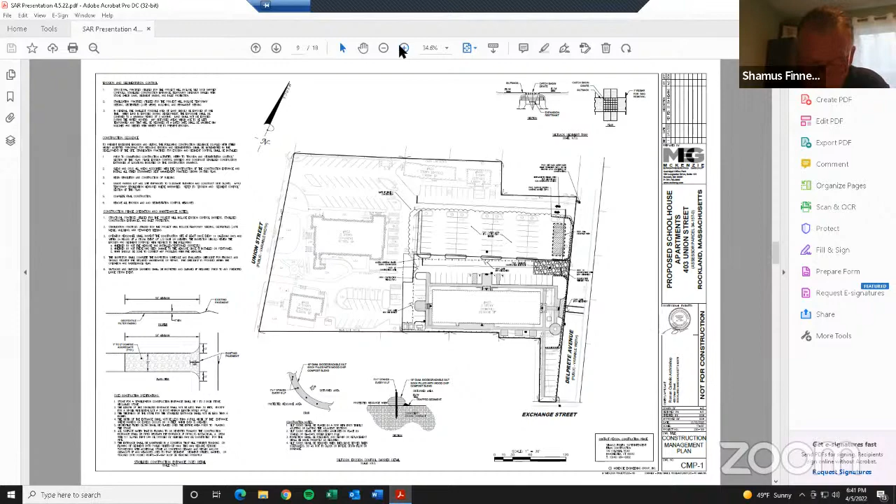Traffic control plans are set to control traffic with construction and neighbors. We'll manage all traffic and coordinate with neighboring properties. For site management, we'll have regular trash and debris removal, with all dumpsters enclosed in the fence, and chutes from the second floor down during demolition.

For noise control, we'll try not to do any noisy work before 8 o'clock in the morning. For rodent control, we'll have an extermination company on site with a whole process set up. Snow removal during construction will be done by laborers on site inside the construction area, and the exterior will be done by a company. Material deliveries will all be coordinated inside the fence, with no deliveries out on the streets.

Erosion control, I already spoke about - we'll have silt socks and everything set up for any runoff. We have a construction staging area, and parking will be right outside the fence for all employees and construction parking, so nobody will be on the street. For construction signage, we'll have all necessary signage around the fences posted with contact people such as myself, so anybody can get a hold of us at any time.

That's basically it.

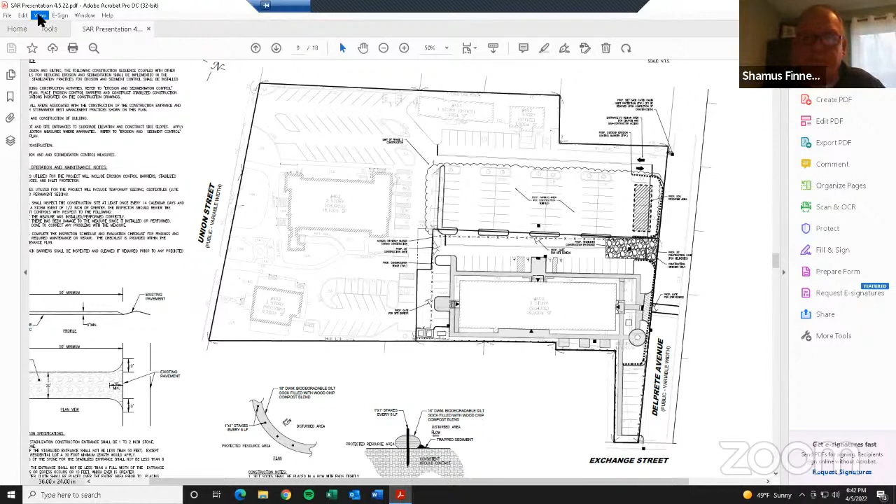Nice, well thought out plan. Can I ask a quick question?

When it comes to material deliveries, big larger truck deliveries - not just everybody's pickup truck - how are you guys going to access the site? Are you coming in through Union Street? Are you coming in through, let's say, Exchange and down Delprete?

That would be going to Shamus, and Shamus is muted. Shamus, Rob, I can handle that question. That's something that Shamus's office would coordinate with the police department for their preferred truck routes into the location.

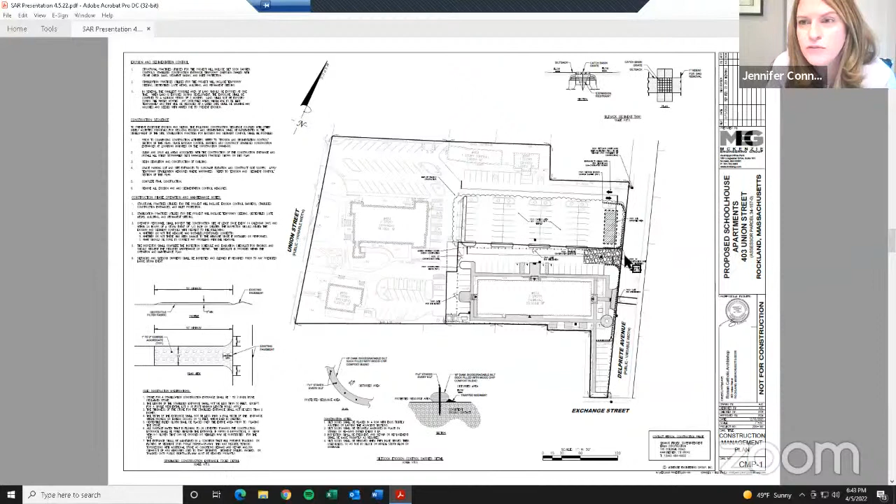Okay, as long as the PD is okay with that, that's a great answer. Very good, thank you. Thank you. All right, so we got that. That was a good addition to the plan set.

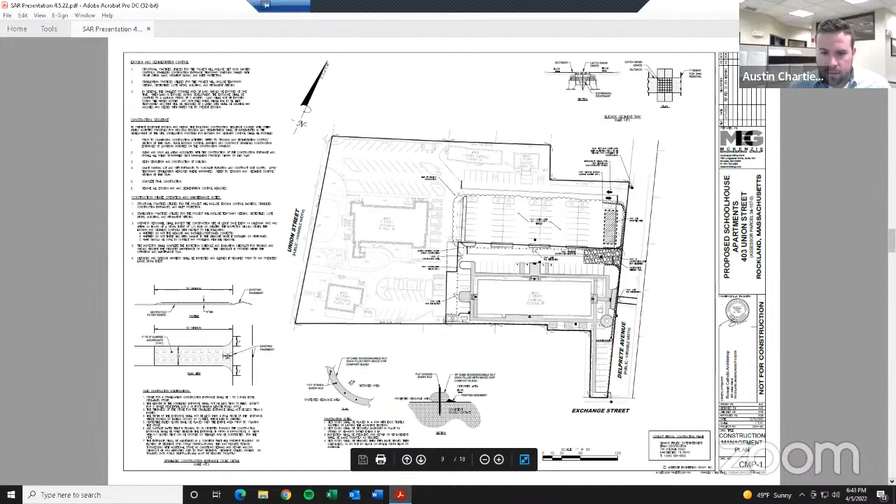Mr. Chartier, where do you want to go from here? I think the next is the landscape revisions. We've basically prepared a full set here. I think Michael might be here from MDLA. Yes, this is Mike Rettenmeyer from MDLA, representing our firm.

Thanks, Austin. Mike, if you want to, please just take us through the plan. Thanks, Rob. So what we have here in our permit set is our planting plan, as well as a lighting and photometrics plan. Up on the screen is our planting plan. You could see around the proposed parking area, we've included street trees and planted islands where possible across from the main entry.

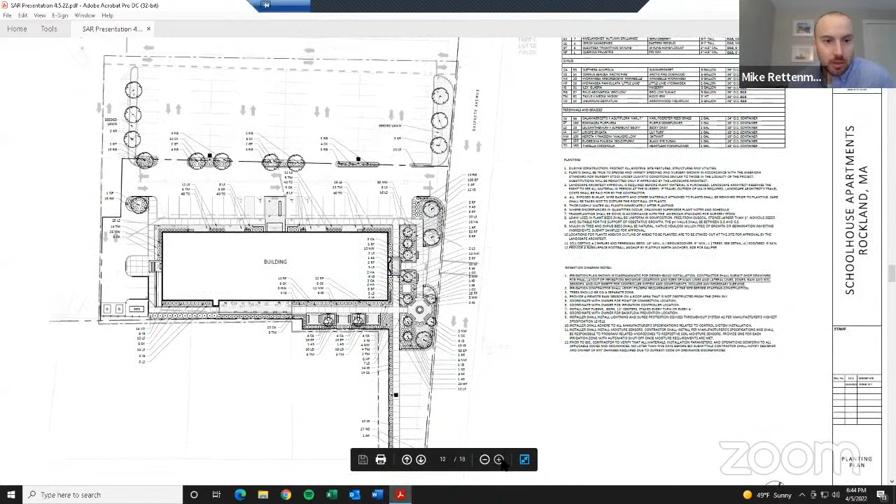Closer to the center of the building at the main entrance, we've provided shrub and perennial massing to create a nice visual entry. There's some seating options for residents as well. Going towards Delprete, which is on the right side of the plan, we've included a linear grouping of shade trees, as well as a mix of pedestrian circulation along the drop-off and some seating opportunities at that entrance.

With this being a residential building, we wanted to provide some different options for gathering outside - you could see the circular area with a water feature, some smaller bench areas just to the left, as well as some raised perennial garden beds. Again, we've planted with shrubs and perennials around the limits, around the fence that goes along that property line as well, adding some nice visual interest to the streetscape along Delprete, as well as within the parking area and the main entry.

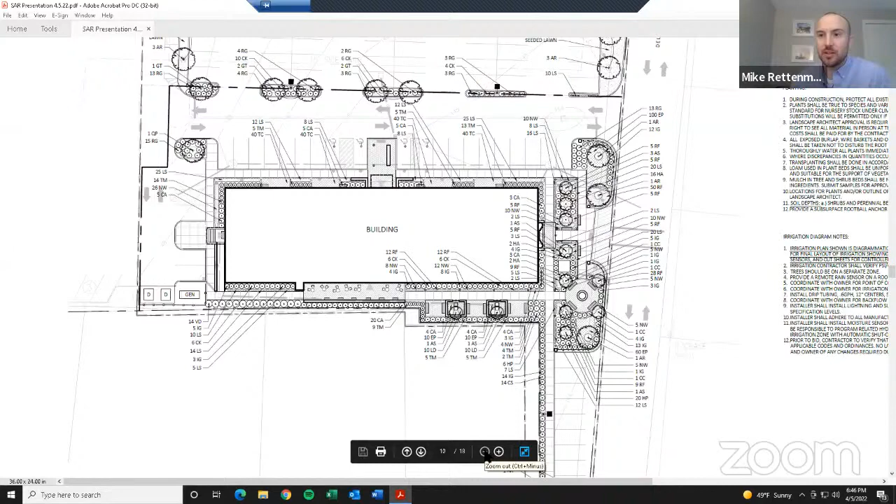But again, this is substantial - this is one of the better landscape plans we've seen presented. Thank you. But the goal is just to create a nice experience for the people that live there, as well as any visitors to the site and the general neighborhood. So there'll be year-round interest between the different perennials, evergreen shrubs, and that type of plant material.

On the next sheet, this is our photometrics plan. All of our fixtures are dark sky compliant. There's fixtures mounted to the building that illuminate the parking spaces directly adjacent to the main entry. We've included two parking lot pole lights in the parking islands directly above. Thank you for running the cursor there.

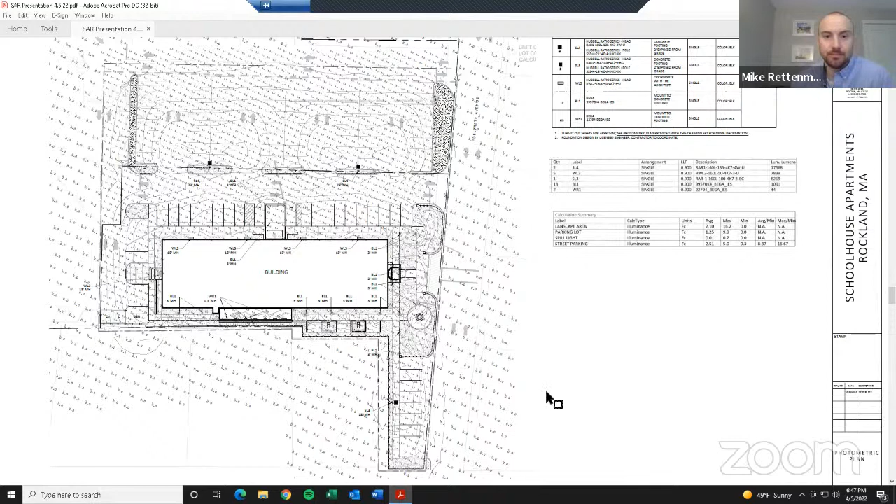Along the pedestrian walkways on the lower side of the page, we've included bollard lighting, and there's a large seat wall in the gathering space towards the center of the building that has bench and low lighting as well, just to safely illuminate any pedestrian walkways. We've minimized any light spill over the property lines with how these lights have been located. On the next sheet are just some cut sheets of those fixtures, I believe.

So you can see the circular light is the bench lighting. We have the bollard light to the right of that, and then the building mounted lighting and the pole lights are all of the same family. So LED lighting, full cutoff, and just simple fixtures to not draw too much attention.

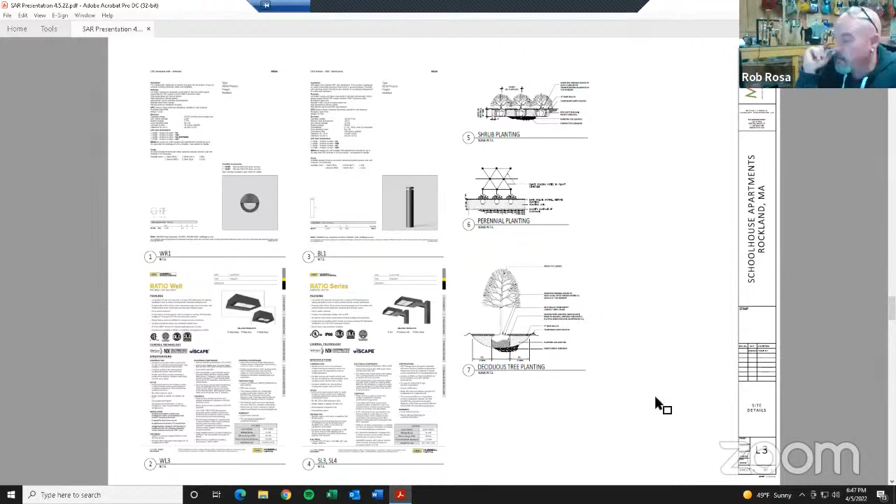Well done. I believe that should be it from the landscape side of things. So thank you. I'd like to get back to Pat Brennan's letter. I was wondering if Austin could give it your general feeling as an engineer, your feeling to that letter?

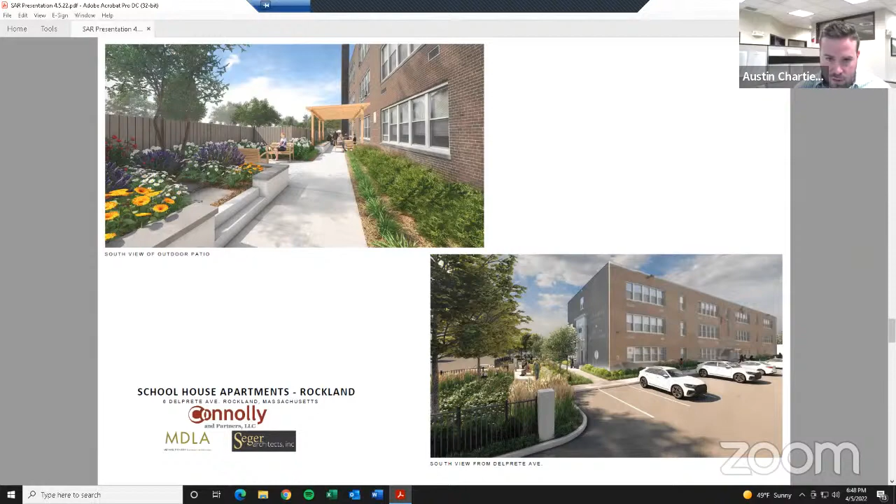Yeah, overall the comments are very minor in nature. The two comments were basically: upgrade existing catch basins that are going to be altered to provide a 4-foot sump, as well as an oil trap or a hood over the outlet, which is pretty common practice in general. So we would definitely be upgrading all the drainage infrastructure that is altered and improved to basically capture anything new on site. Also, because of the proposed change around the building, we're actually decreasing the runoff because we're providing some landscaping features and decreasing the impervious cover around the building. Today the pavement runs right up to it.

So none of the comments would really require much, it would just be addressed in the next submittal moving forward, I suppose. A simple note would suffice.

Right, exactly. I do have one question for you, Mr. Chartier. When it comes to the catch basins that are existing, do you know if they're deep sump or if they're just old school catch basins with nothing?

Yeah, I've been out there and I did inspect some of them. From what I saw, most of them don't have sumps, or not 4-foot sumps. A couple of them do have 2-foot sumps, but they're full of stuff. So obviously, as part of this work, there will be some cleaning of pipes and structures that will take place.

Okay, so anything that's really getting altered on our site is going to be improved to bring in compliant structures. And there will be some altering because the grading is changing off the building. So it'll definitely be an improvement to what's there.

Definitely, definitely. I think you guys knew about it. I'm not sure if the applicant or the team members for the applicant knew about this, but no, we did. We talked about this last time. We were going to have a site meeting. We did put together a site meeting for all that were involved or all that were curious.

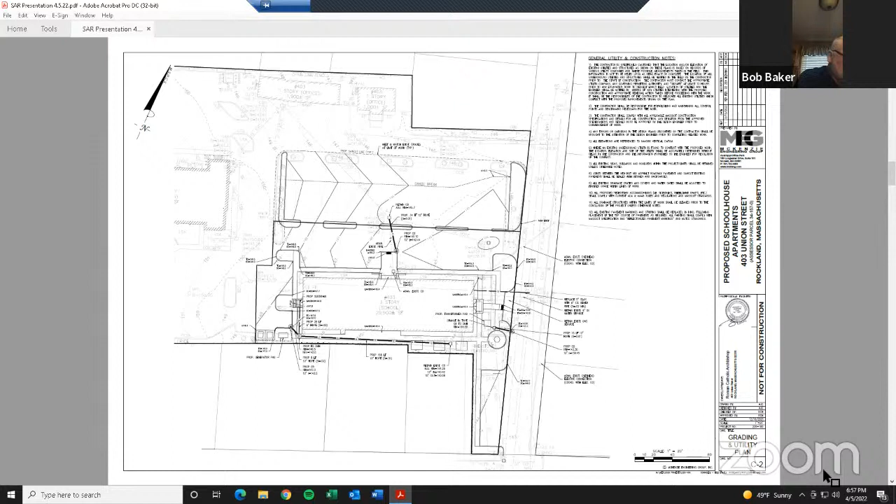That definitely needs to be looked at. I would say keep the church buildings unto themselves, and the schoolhouse building unto itself, so there's a separate sewer line for each address, if you will. I think that would end up working better. Same thing with the water service.

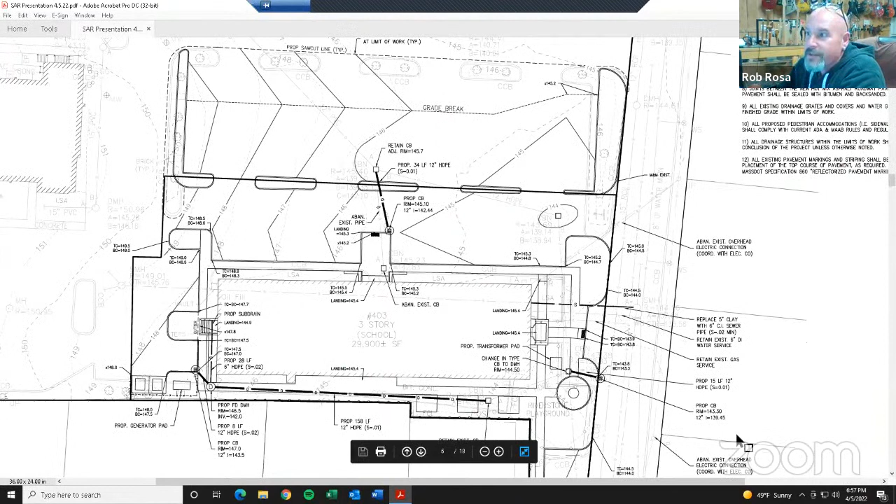Do we know where? Let me see. I'm at the grading and utility plan. I see the existing gas service, which is already good. I see the 6-inch ductile iron water service for the schoolhouse. Do we know if there's any gas or water for the other buildings on site coming through this? I believe they come from Union Street, the church and the other buildings. Okay, because I see a water line, a water line stub off because we don't know where it's going. I see that coming on the north side of the property from Delprete, and then a dead end, so I'm assuming there's a water line coming that way.

It would be nice to figure out where all that stuff is going, because if for some reason it is coming through the piece that's getting cut off, you are going to need separate easements for that. I'd like to make sure that it's 100% away from the piece of property as it's getting cut out. So, further utility work based on records that are available. I'm not saying go get a GPR unit and try to do subsurface work, just with records that are available, if we can figure this out, I'd like to see that, just to make sure that everything stays with each piece of property. So those are concerns that definitely came out at the site meeting.

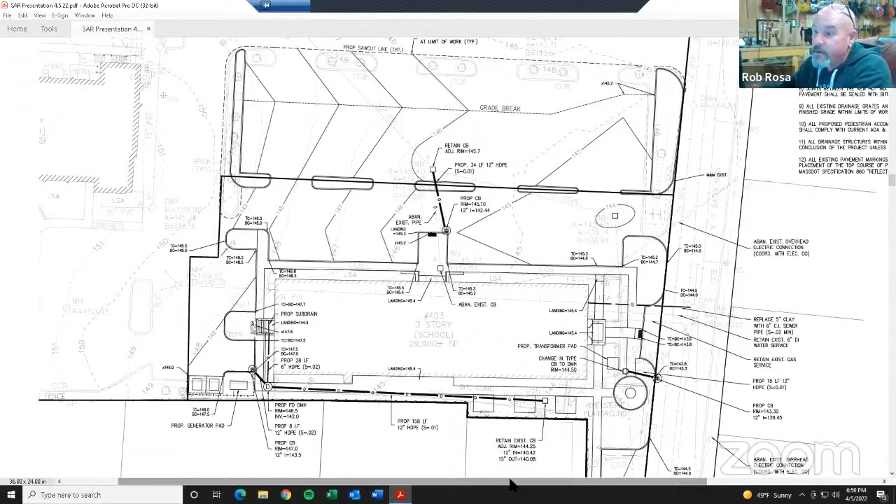Rob, if I may - yes, please. Sheet C2, grading and utility plans. That's what I'm looking at. Okay, it says retain existing gas service. It shows it coming off of Delprete. Yep, that's what I said. Replacing the 5-inch clay with 6-inch CI.

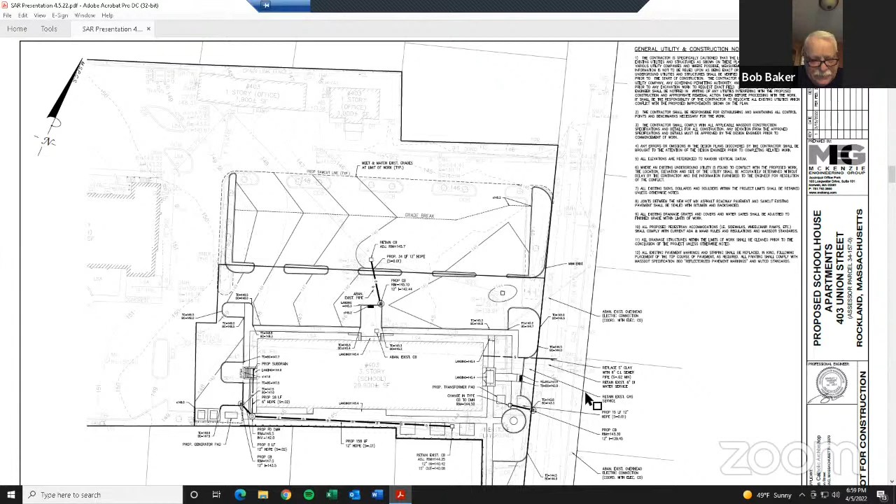Yeah, but the problem is we believe it sounds like it does. I talked to the sewer superintendent today. That pipe does go underneath the school and will have to be replaced because it's clay pipe. And they want that out from under the school and tied into the existing line on Delprete. Perfect.

So, repeating exactly what I already said. Yes, okay, cool. So they're going to have to get a hold of the sewer superintendent and work something out with them.

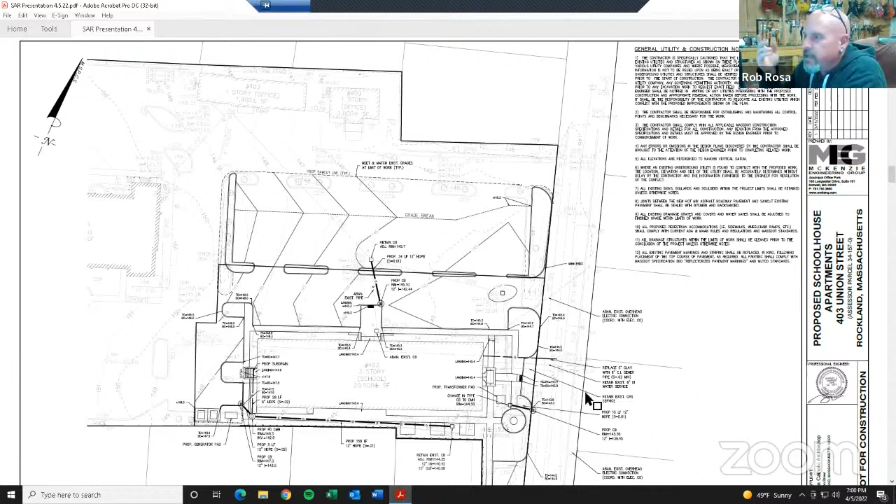No, it's understood. And I don't know if just replacing that pipe would cause a meeting with the sewer commissioners or anything like that, but revising a connection may cause a reason to go to the sewer commission. So either way, Mr. Feely, can you make a kind of reach out to the sewer commissioners? Absolutely. That way, if for some reason you do need to set up a meeting with the commissioners, we can get that on schedule.

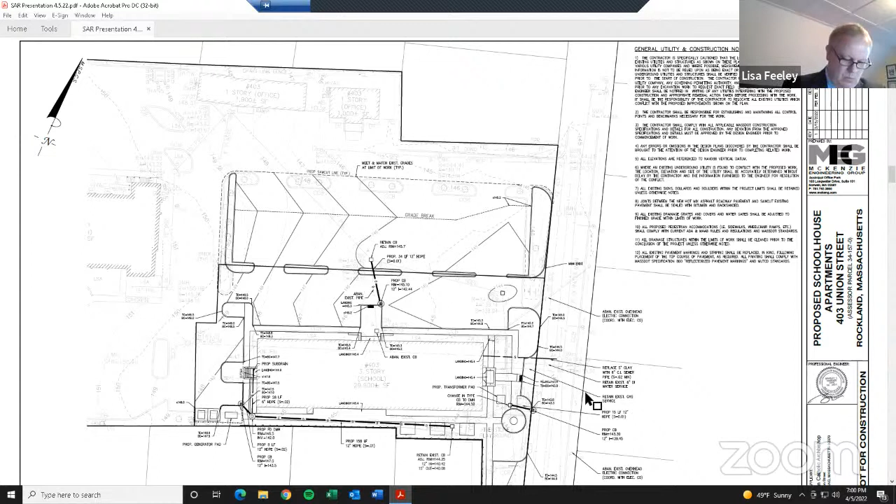And Mr. Chartier, if you can, I would say if you can come up with some sort of design to get that pipe out from under the building and keep that separate, that would be good. Is that something we can talk about? Yeah, absolutely, I think it makes sense. We were aware that it currently did that. So, I think, like you said, the change in ownership, it was on our radar that it might come up where you can't take it into someone else's building. Perfect, because we did that.

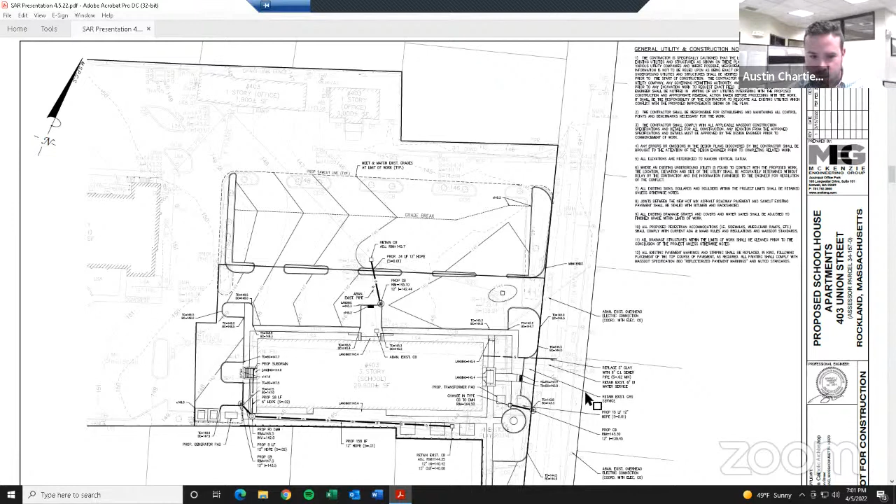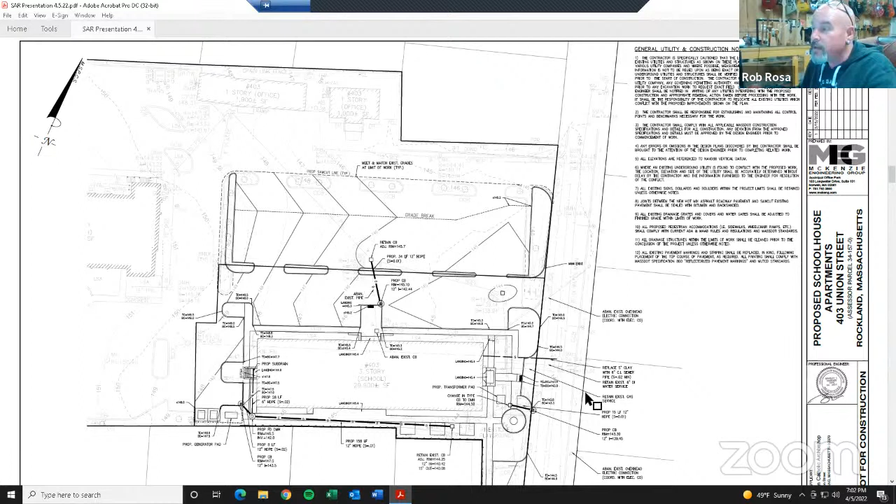I did reach out specifically to the chairman of the planning board just to get his feel on it, because again, with 40Bs, we are the planning board. I just wanted to make sure that he was up to speed with what was going on here. One of his main concerns was making sure that there's separate utilities for each section - that the schoolhouse has its own utilities, that the remainder of the church compound has all its own utilities. So that's something that's definitely going to have to be addressed. And everybody I've talked to so far said that sewer line needs to be adjusted to some degree.

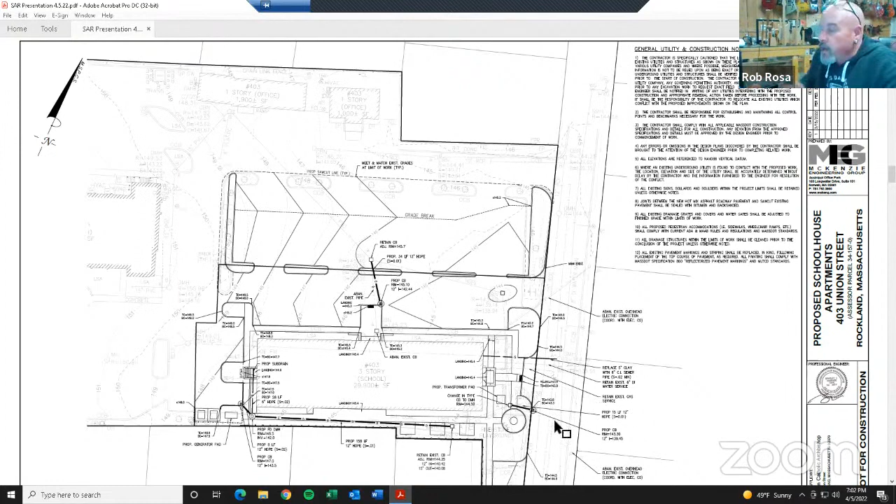Who's the other thing - would they have to show drainage easements, utility easements? Oh yeah, that's another thing I talked to the chairman of the planning board about. When it comes to the ANR plan, we're going to have to show, and list on the ANR plan, all the waivers and all the variance requests. I'm trying to make it a slam dunk for the planning board, so they have no questions whatsoever, because one of the first things they always look at is variances and waiver requests. If they're not on the face of the plan, they're going to come back to me and ask where they are and what they asked for. I'd rather know that they're all on the face of the ANR plan - that way it makes it a lot easier for them.

So in the end, if it comes down to it, we're going to need a sewer. There's the potential for a sewer easement to the church. We're going to need an overall drainage easement for the site that allows the drainage as it stands.

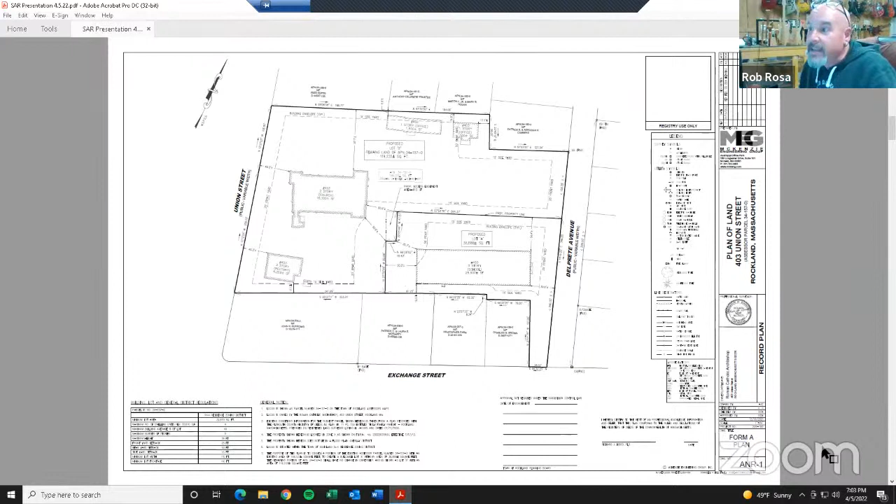Basically, the remainder of the church property is still allowed to drain over and across the schoolhouse property. That's number 2. Number 3, there's going to need to be access easements, probably just down the main thoroughfare, because I'm assuming church patrons are going to end up going down there. If you don't want them going down there, we have to look at the signage plan again. But if they are going to be allowed, there's going to have to be an access easement.

And after that, we can review it. But I think the attorneys involved kind of understand where I'm going, so I'm sure they'll put together a comprehensive easement document that puts this all together. That's something I was talking to the planning board chairman about. Like I said, I just want to make it go simple and smoothly. So those are a couple of things we got to look at.

When it comes to parking, it was brought up that... let's get to the existing conditions plan here. Where are we? Not that one, not that one. The existing conditions plan. Primarily, these spots are 9 by 18. Is that correct? Yes, I believe so. Proposed are 9 by 18.

Okay. Do we know what's going on with the rest of the site as far as parking, Rob? As far as parking, kind of average on that, because typically when we're looking at 9x18, that's a reduced parking stall. So we look at that 70-30, 70% conforming, 30% reduced size.

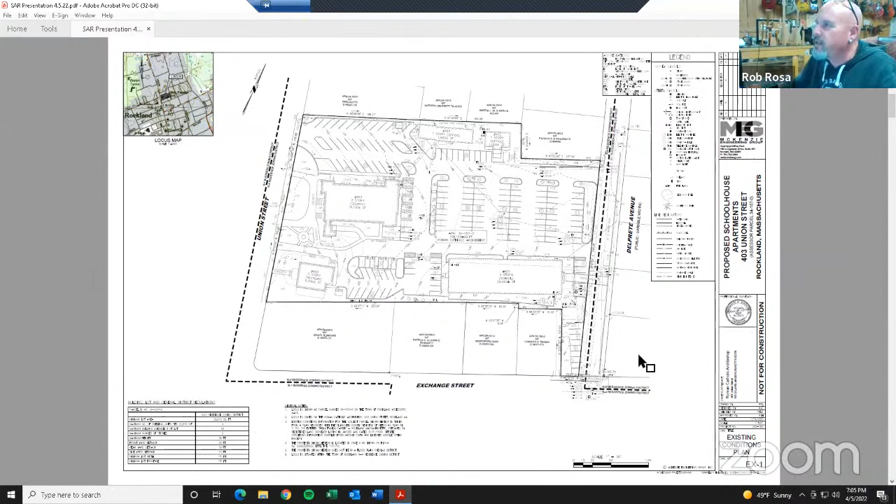So I just want to see where we are on that. I know we did a parking count, a parking table somewhere. I don't know what plan we did it on, but I know we did a parking table. I'm pretty sure we did one someplace. It's on the parking site summary or something. That's the church's parking spaces.

Yeah, I think they're all about 9x18 out there. Okay, so primarily we're dealing with nothing but reduced size spaces. Correct. So in redoing the spaces by providing the 9x18, we're really not changing anything, we're just changing the location of some of these spaces. Yes.

Okay, all right, I just wanted to make sure on that. Okay, I've talked too much. Who wants to talk next? Charlie, I busted in on you. Do you have anything else that you want to go over, sir?

No, I think so. There is going to be some sort of, and I think Mike Feeley can speak to it, some sort of reciprocal easement going in here that basically says the whole property is going to be under an easement for shared use, kind of, is my understanding. That's kind of in the language of something.

Rob, we're working with the Archdiocese on a license agreement specifically to add more parking spaces for their use when they have overflow, Sunday mass, Saturday mass, religious holidays. It is on the west side, those 6 spaces - I don't have a cursor to access it, but the 6 spaces on the left side right there.

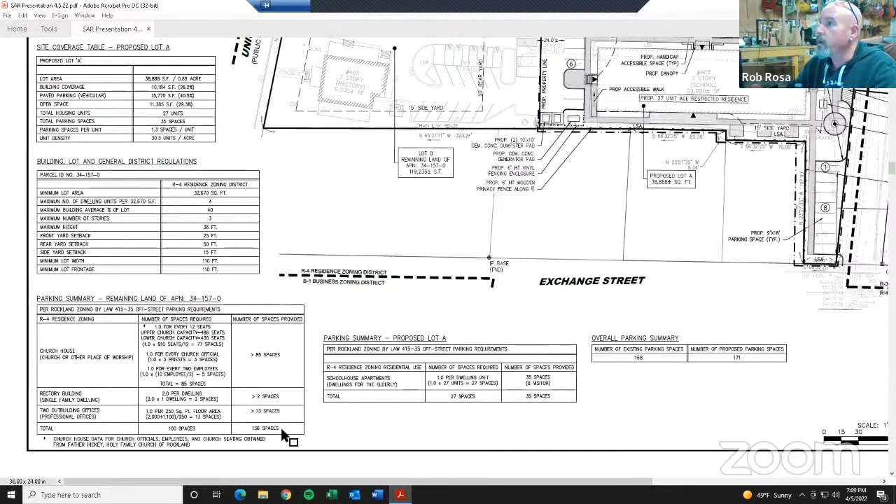Mr. Baker, thank you for bringing that up, I appreciate that. All right, one more before I don't want to keep talking too much. We went over Pat Brennan's letter, and the thing from Concom, we're gonna keep looking at that a little bit.

I'm not sure, did you guys see the response from the fire department? No, I did not. I haven't seen that. All right, we'll forward that to you. I don't want to go too far into it. Some of this is site related, but a lot of it's building related. I'll ask Deb. Deb, you're here, right? Yes, I'm here.

Okay, cool. Deb, can you do me a favor? Can you forward the fire department letter to the applicant's team, and did you see the comments from the police department, they had nothing to say. Did you see the comments from the highway department and the sewer department at this point? We've kind of already gone over it, but just to say that you have it, we'll get that to you too.

Mr. Chair, on the fire department memo, how old is that memo? Because I know we responded to an initial one. Quite a while ago, 2-16-22. I don't think we've seen that one, but we did respond in total to an original one. Okay, so this is again February 16th of 2022.

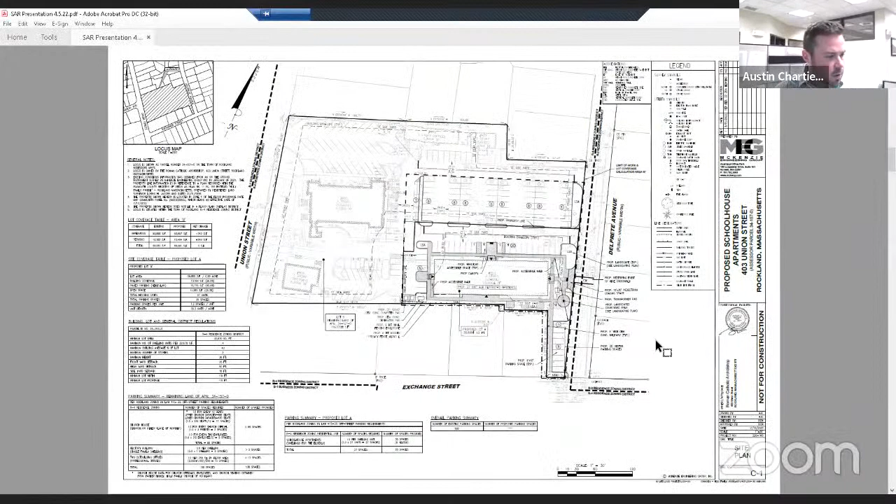Not the traffic management plan, what is this, the traffic flow? Yeah, it's one-way parking there, so you pull in head first, you back out, you keep going, kind of thing. I think we had talked about this at the last meeting. Father Hickey might have spoke to this way back when they planned that. They wanted the traffic going out on Delprete, not turning out onto Union, so there's no access out onto Union.

See how these center ones are? They're gonna have to come in on the left-hand side and face out. And then the people over here, because there's no lines up there anyway, people come out of that out front more than they go out back. Well, when it comes to signage, do we put any? I saw the one-way do not enter down at the islands there, at the backside of the church.

What I'm gonna recommend then is that up at that section, we throw in a couple of extra signs, one way, either pointing into the site, do not enter, or enter only, or something like that. Mr. Chartier, you can come up with something, put a one-way sign up the top. Sure, on Union Street going in.

That covers that. Plus, it's an existing condition, we really can't touch it.

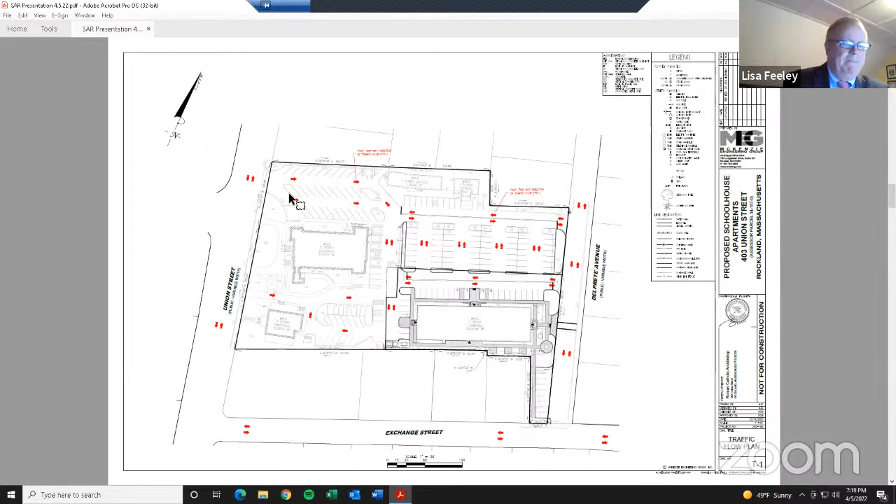Well, at some point we're going to have another meeting. Would you like the full set done again, or just some of these tweaks we're talking about? Any plan that requires a modification - if it shows up on one plan and also shows up on another, we're going to need both of them. That's really what it comes down to.

I think we can probably get away with, and we'll discuss this with the board to make sure, but I think we can get away with 11 by 17s as opposed to full size at this point, because there's minor modifications on just about everything. So if we can deal with 11 by 17s, anything that got revised, colorize it - make it green or blue so it stands out, or cloud it, something simple.

Board members that are here, does 11 by 17 work, if you need paper, Mr. Baker Senior? Yes, yes. Okay, so 11 by 17s in place of full-size plans. Does that work for the applicant and everybody? Yes, absolutely. All right, board members, we're good with it. Mr. Galley, we're good with it. Yes. So that helps cut down the cost, right? Yeah, yeah. Okay.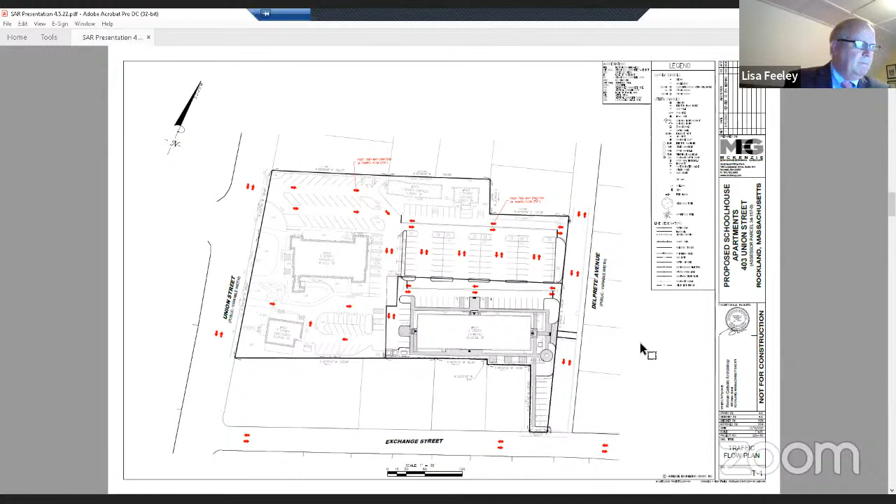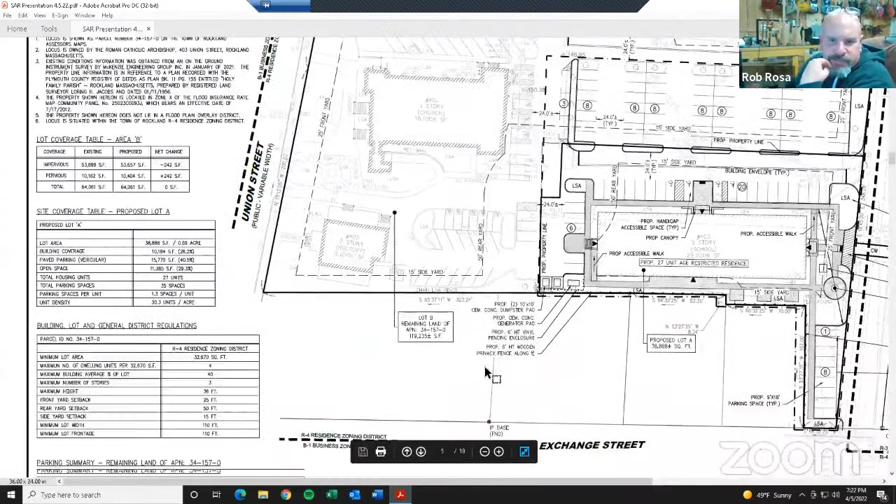Yeah, I would just like to have that drawing up on the screen again with the occupancy loads. Julia, can we put it back up? Thank you. The occupancy loads, are you talking about on the site plan? Yeah, first the main floor, lower floor, and the chorus. Is that the site plan or architectural plan? I think it would have been the arc. No, it's on this site plan here, I believe, the loads. I think the occupancy loading might be the architectural. For the church and the whole site, or? For the church. Yeah, I think it's on that plan you just had. All right, where are we looking? Okay, there it is.

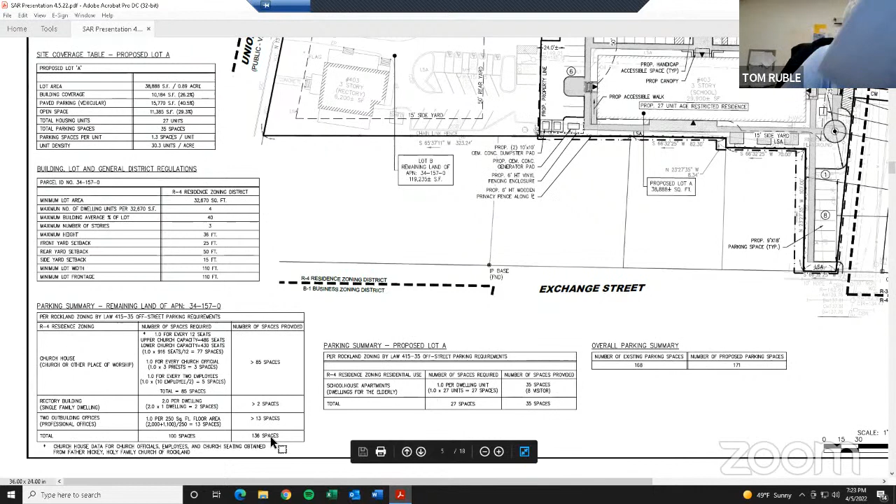So that basically says, based on square footages of the buildings on site, they need 100 spaces. They have 136 spaces. Yeah, those are the spaces. I'm looking at the actual physical occupancy load for inside the church - which structurally regulates the parking. Oh yeah, it's under 415-35 D1. They require a parking space for every 12 seats.

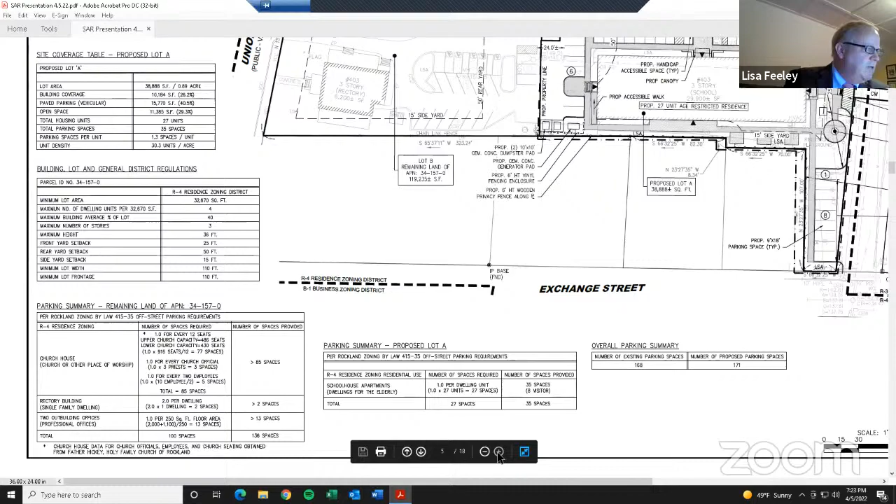And when we did that calculation, we had the upper church and the lower church capacity put in there. Okay, and then it's one for every church official, and one for every 2 employees and one for every church official. And then as we go down to the rectory building, there's 2 in there. The professional office buildings or outbuildings are done via square footage, and there's 13 spaces for that, at 1 per every 250 square feet.

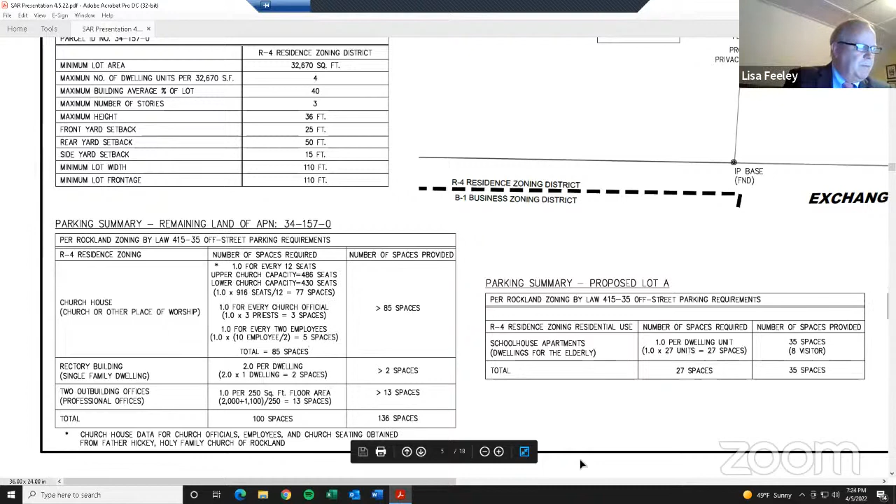So are you having issues with that calc? Yeah, could I see the narrative or the scratch sheets on how you came up with those occupancy loads? Yeah, we can provide that. Okay, thank you. All right, so there's going to be some back and forth - if we can just provide that to Deb, and Deb will forward it on to Mr. Ruble. What else you got, sir? You got anything else you want to talk about? No, I'm all set. Thank you, Tom. I appreciate that. All right, can we unshare the screen again, just so I can see who we're dealing with?

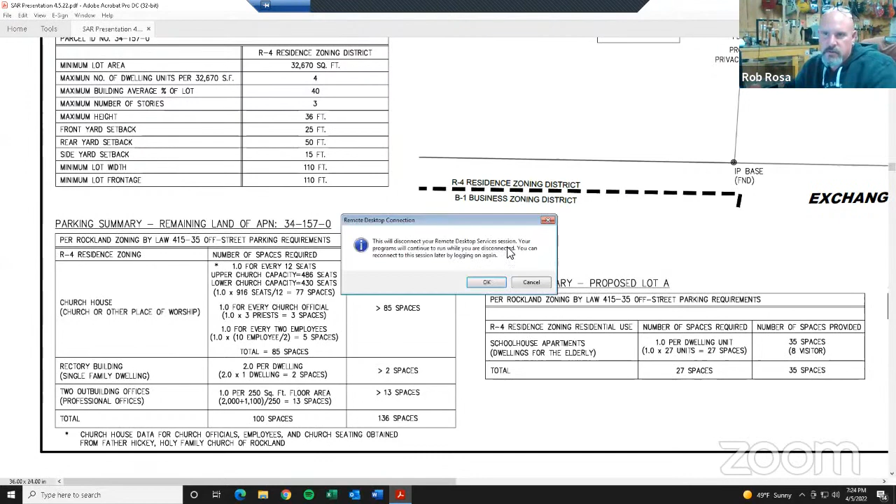All right, Mr. Baker Senior, we talked. Mr. Tansy, you're up next.

I don't have any comments or questions. Delprete Ave, that wasn't paved within the last 5 years, right? Yes, it was. Is there a moratorium on that for opening it?

Austin, can you answer that? It's on a state road, right? Yes, but I don't know when it was last paved, so I'm not aware of any moratorium on it.

Generally there's a 5-year moratorium, I thought it was a state road, not a small public road. But Delprete, yeah, the 5-year moratorium I think is for state roads. I don't know if it's for a small public street or private road. It would, if the town can have their own moratorium.

So that's something we'd have to talk to Highway about, unless Mr. Baker, you know 100%. When we did the overrides, they put in the override that once the road was completed, it could not be open for anything but emergencies for a 5-year moratorium.

All right, well we're gonna have to get specific dates then. And if it comes down to the exact minute, I'm gonna want to see it. Because this is a good thing here, and if that's gonna be one thing that stands in the way, and that's not a zoning issue, I don't think we can waive that. But that's something that we need.

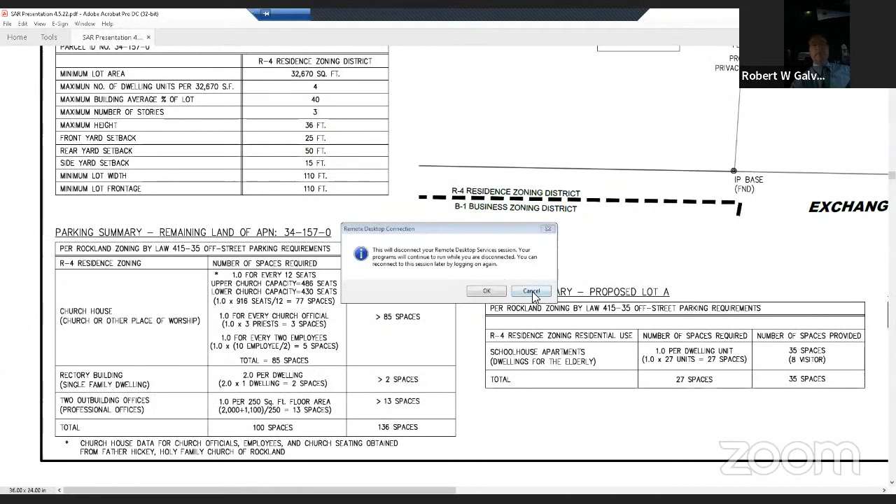Julia, are you there? Oh no, it's not in this plan, it's in a separate sheet. Yeah, I think it was like the second or third to last page, from the original submission. In the original submission, so that's tough. Let me see if I can find it.

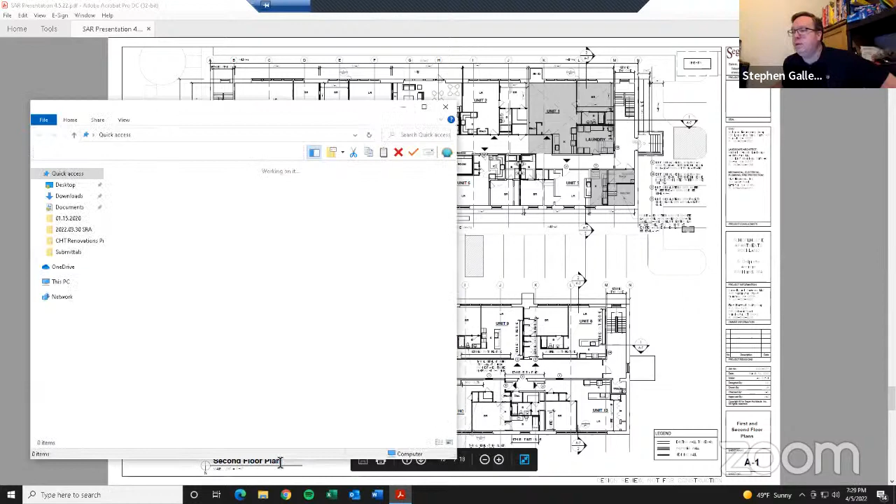Julia, I don't think it's gonna be part of this presentation, it'll be part of the first one. Yeah, page 7, if you don't have that, I can probably find it. Oh, this is good, now it's a race to see who can come up with it first.

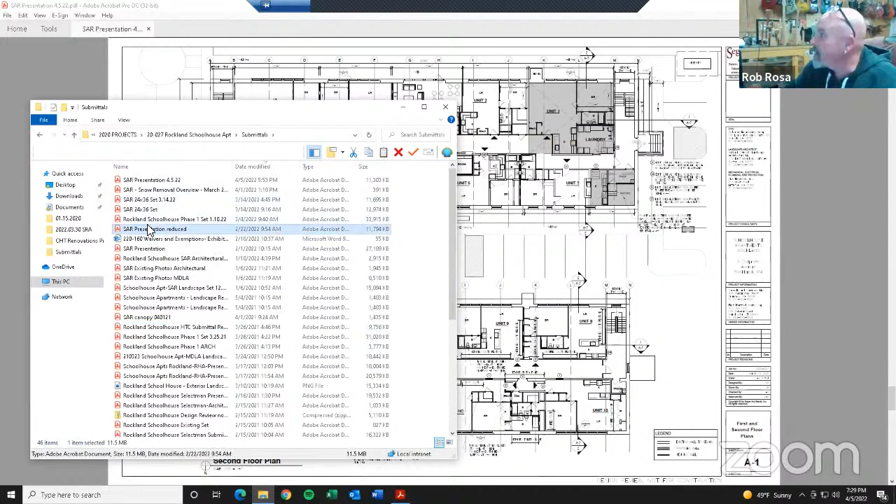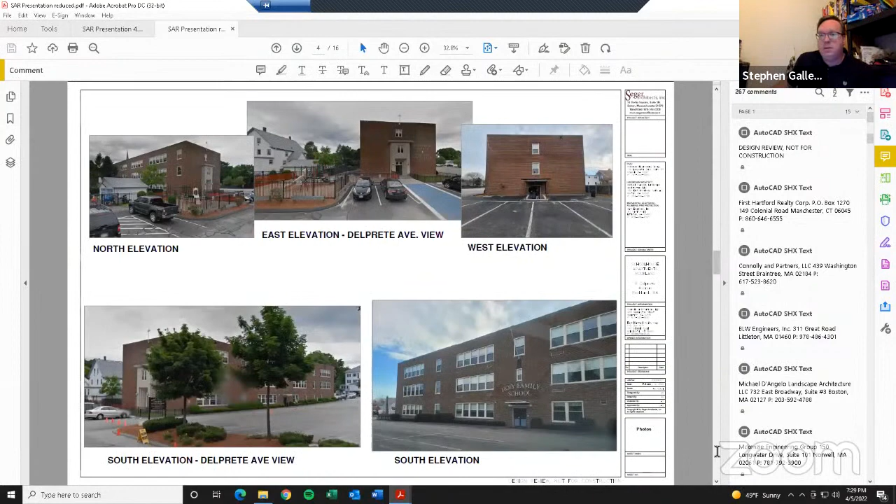Yeah, this is a long download. Uh-oh. If you're on the Town of Rockland website, it's just a file called 6 Delprete Ave. Downloading it right now. Oh, there it is. Now I gotta find it. Start with page 76 on the PDF. Well, 75 is the chapter, Exhibit 1, requested waivers, applicable sections of the Town of Rockland zoning bylaw pertinent to this application.

I got it first, I win. You get a free confession next Sunday, that's my prize. I just saw when you were right there. There it is.

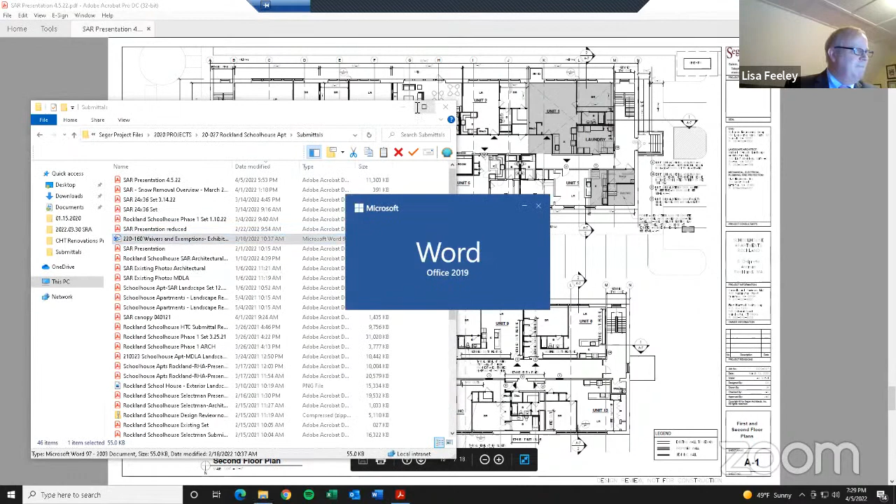And Austin, can we go through this a little bit?

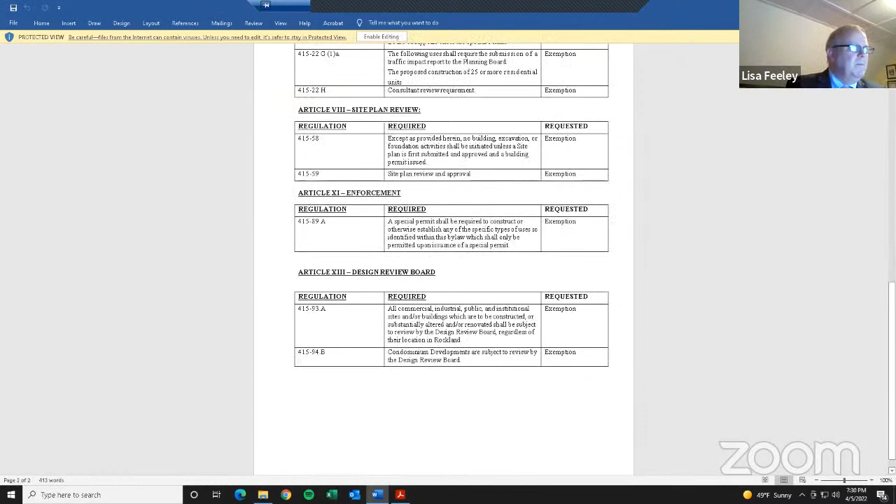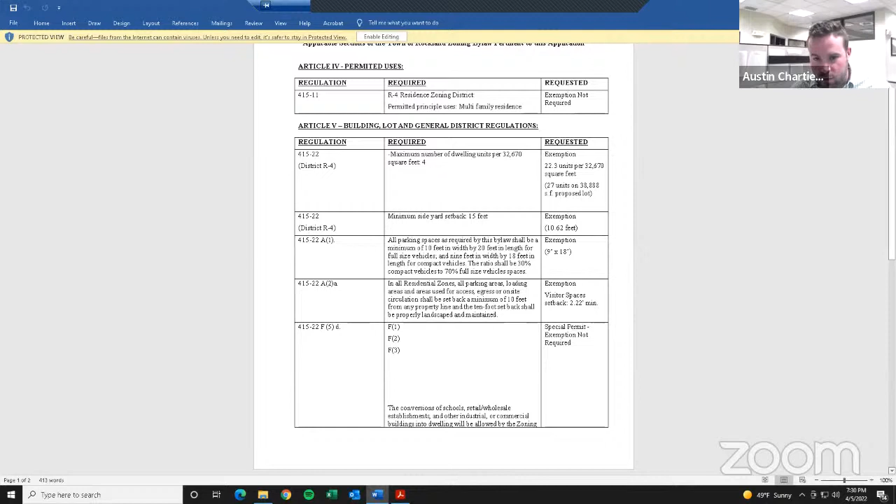Yeah, so we just went through the zoning bylaws, like your parking space size that we got into a little bit, we have that in there. Since we're in a public meeting, I just want to go through every single one so everybody understands. This is one of the things a lot of people want to talk about when it comes to other 40Bs, so if we can nip this in the bud now for this application, at least we can say that.

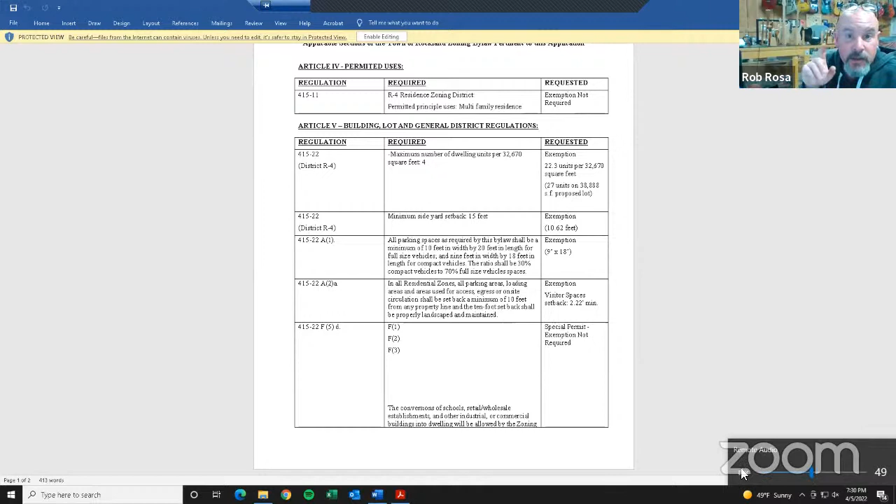So first, yeah, I can run through every exemption, single one, starting at the first, and then just take care of it.

Regulation 41522 in the R4 zoning district requires 32,670 square feet per dwelling. We are requesting, sorry, that didn't come out right, 22.3 units per 32,670 square feet. And that's just the 27 units on the size of the lot.

Regulation 41522, minimum side yard setback 15 feet. The existing building there today is 10.62 feet, so we're not making it any worse, but that's what's there.

41522A. Before you stop there, let me pull up the existing conditions so I know what we're looking at, or I know what we're referring to. Where specifically on the building are we looking?

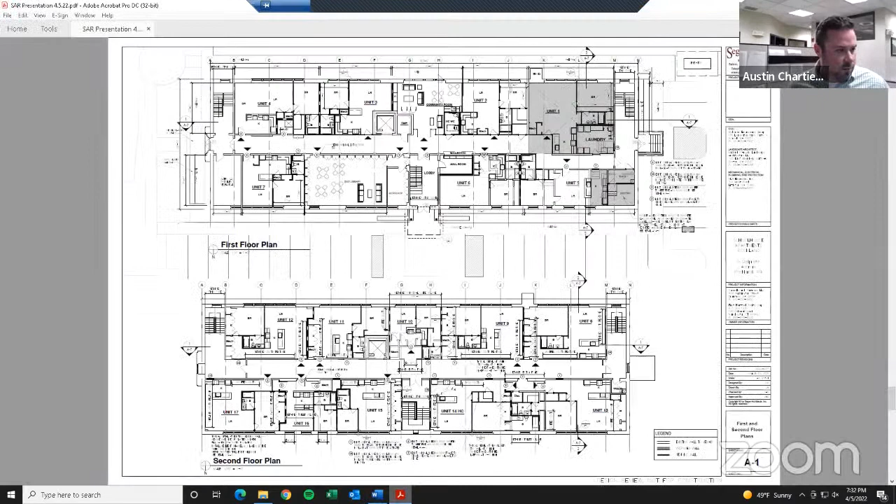So that's going to be on the south side of the building if you're looking at the plan, adjacent to kind of where it jigs out a little bit. Yep, down there. So if you went to the existing condition plan, we have it dimensioned.

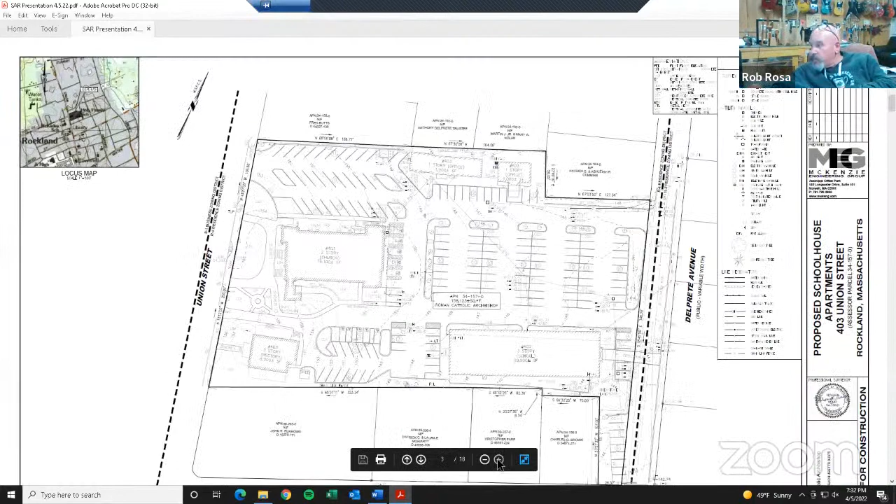Or we should have it dimensioned. This is the new submittal. I don't see it there. It is an existing condition. All right, I'm not saying that it's not.

So there really, there's nothing there, no variance required there. The only thing is that because of the ANR, that's where that's coming into play. Attorney Galvin, do they need to request that?

Hold on a second, sorry. I was listening to the comments before about the ANR, and remember what the ANR is really intended to do here is to create a building lot. So all they really have to show is frontage and area. They don't have to worry about zoning compliance of the lot because this is a project that isn't going to strictly comply with zoning since it's being submitted as a 40B project.

So the existing condition here is pre-existing non-conforming. I'm not sure technically whether, since they're not making it any worse, they needed a variance, but it doesn't comply, so it's on the list. And I think it's appropriate for it to be on this list, but this would be one that we would favorably recommend. I would be favorably recommending that the board grant it.

Oh, absolutely, I'm not worried about that. It's more trying to help out the planning board in the end, when they see the ANR and go, wow, that's close to the building. That's really what it's coming down to, just making sure that's on the face of the plan. Technically, they're not allowed to consider whether it complies with zoning other than its frontage and area.

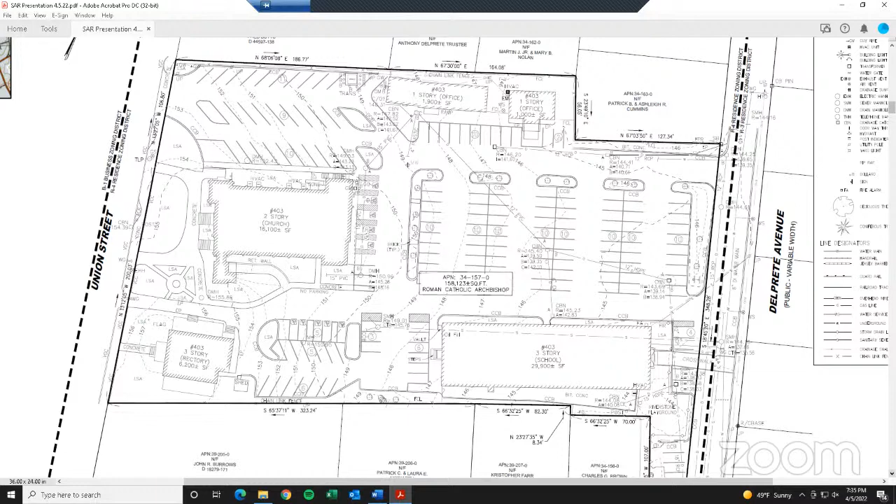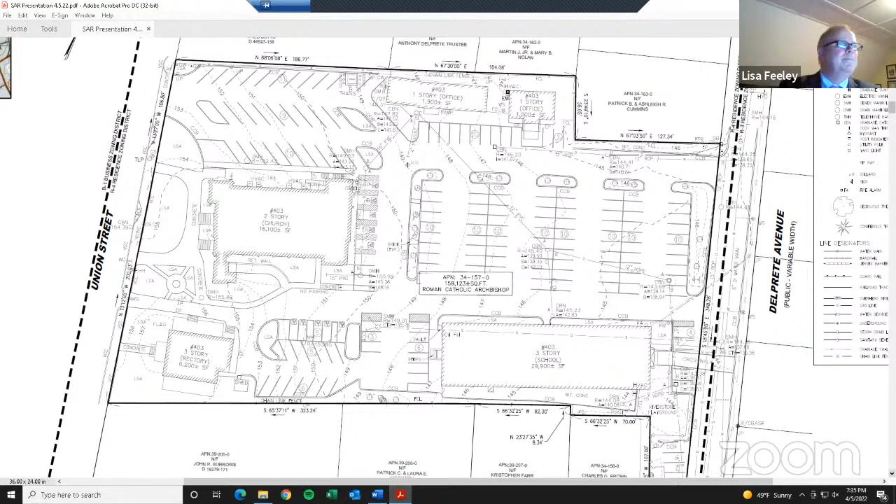Either way, I'm not too worried about it. Again, Attorney Galvin has stated that he finds it appropriate to be on the list. Mr. Chartier, I'm sorry to butt in on that. I appreciate that, keep on keeping on here. All right, if we can pull up the list.

All right, so minimum side yard setback, that's all taken. Parking spaces regulation 415-22A1 requires 10 by 20 parking spaces for full-size vehicles, with 9 by 18 being the reduced size. We're doing all 9 by 18, so we're requesting an exemption.

Regulation 415-22A2A: in all residential zones, all parking areas, loading areas, and areas used for access, egress, or on-site circulation shall be at least 10 feet from a property line, and the 10-foot setback shall be properly landscaped and maintained. There's an existing section of those visitor parking spaces that's basically on the roadway, on Delprete Ave, so we're requesting that 10 feet be 2.22.

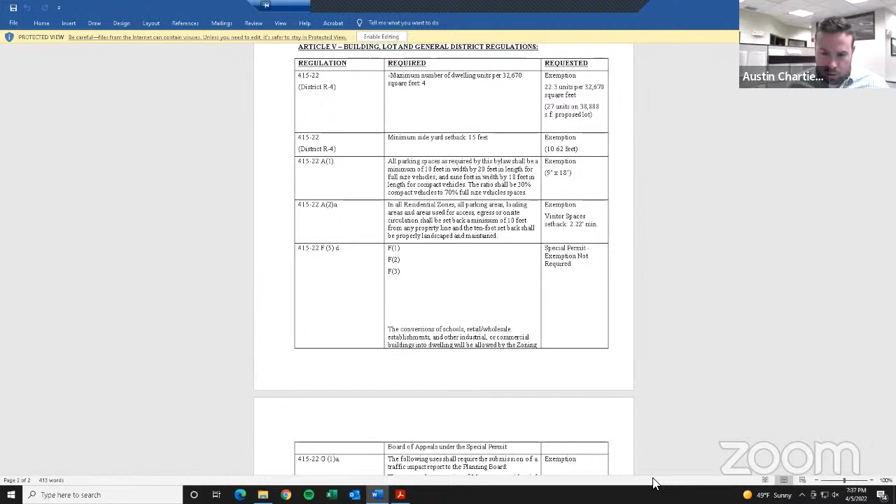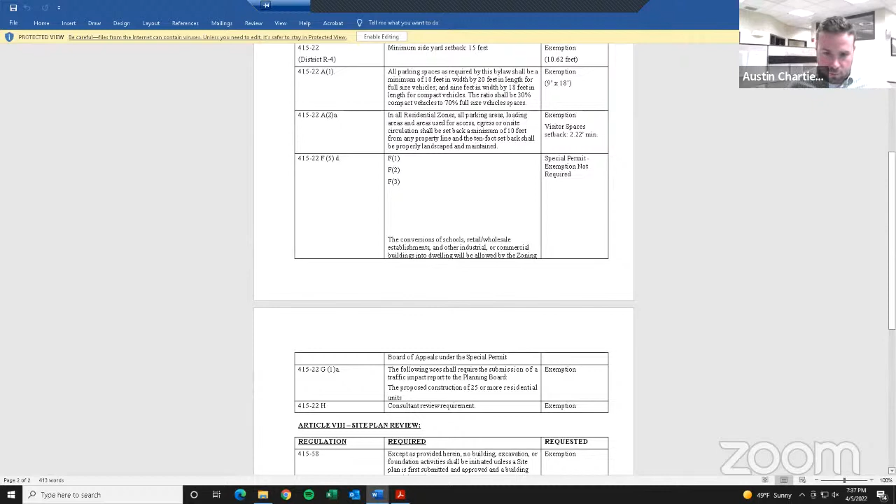Regulation 415-22F5D applies to special permits for conversions of schools. We're not requesting an exemption here, but listed it in case it came up. It says conversions of schools in certain districts require a special permit, but we're not requesting that special permit because of the 40B — that should be subject to the comprehensive permit, the overall comprehensive permit.

Right, exactly. So the next one we're requesting is 415-22G1A: following uses shall require submission of a traffic impact report to the planning board, over 25 residential units. So we're requesting an exemption to not prepare that impact assessment.

No, I'm just going to butt in real quick. I talked to Pat Brennan about this — it does meet the threshold for a traffic impact study. Again, you're asking for the exemption, and the board's going to have to talk about whether they want to allow that or not. Right, so we'll talk about that after. Sorry to butt in, I apologize, just wanted to take care of that.

Regulation 415-22H, consultant review — we're asking for the exemption as part of the site plan aspect of it. Obviously Pat Brennan has done a review, but we were filing as exempt from it.

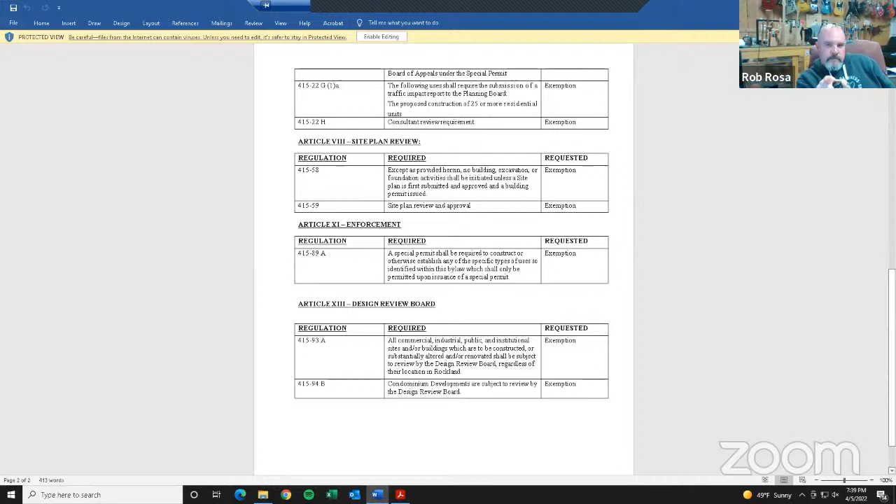Regulation, that would be something we wouldn't allow — we always need our professionals to look at that, so that's going to have to come off the exempt list. Attorney Galvin: I'd recommend we deny it, subject to our ordinary processes. We typically propose a condition requiring the applicant to fund peer review for construction monitoring, so Mr. Brennan would be doing that to assist Mr. Ruble. We'll give the applicant the draft condition from our other comprehensive permits and see if they're amenable to that. So we keep this on here and say deny it? Sure, I can, because this is what was filed, so it's on record. But these might apply to the next two as well.

Regulation 415-58, under the site plan review article: no building, excavation, or foundation activities shall be initiated unless a site plan is first submitted and a building permit issued. The next one, very similar, 415-59, site plan review and approval.

You're functionally actually doing that right now, correct.

All right, so under enforcement, 415-89A: a special permit shall be required to construct or otherwise establish any of the specific types of uses identified within this bylaw, which shall be permitted only upon issuance of a special permit. That special permit just applies to the alteration of a school building, so basically we don't need a special permit.

Design Review Board article, regulation 415-93A: all commercial, industrial, public and institutional sites and or buildings which are to be constructed, altered, or renovated shall be subject to review by the Design Review Board, regardless of their location in Rockland. That's it, and the next one.

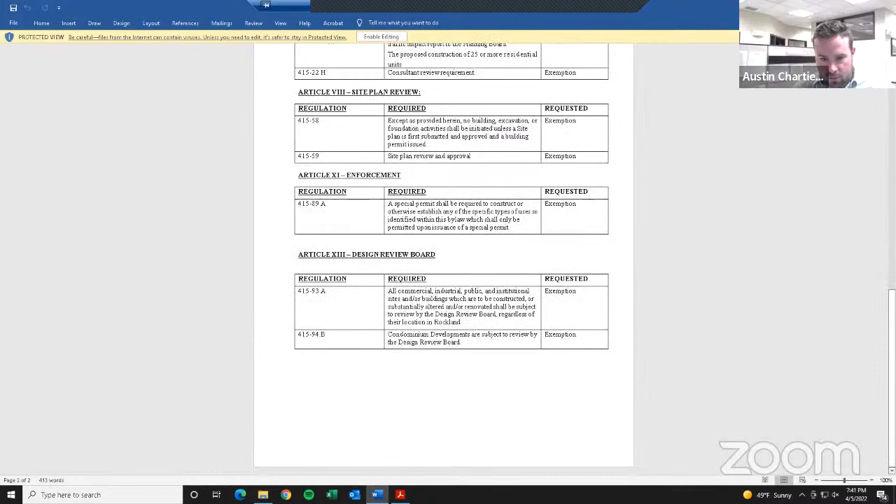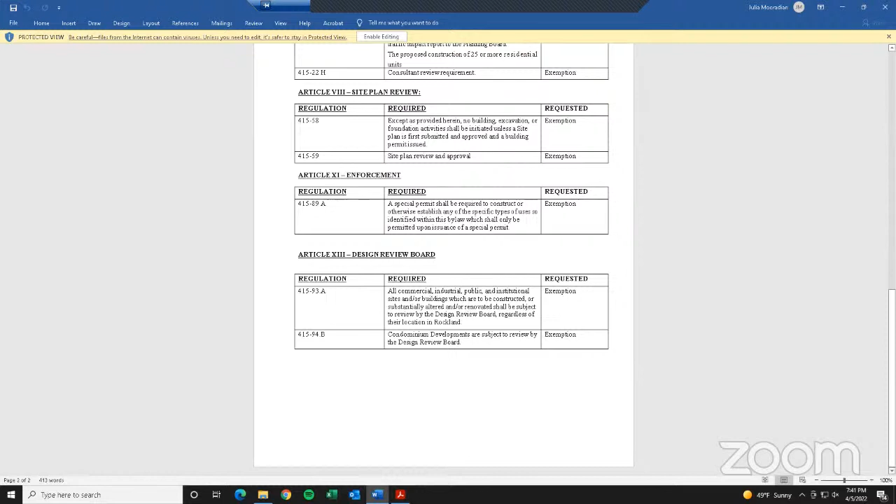Attorney Galvin, in the end will you be able to go over this and recommend how we should deal with this? Yeah, we typically would waive that because they're giving you architectural designs and the board can act as the design review entity here. That's why they gave you the renderings and the colored plans and things like that. So my recommendation is that the board grant that waiver request.

All right, so currently right now, that's the entirety of the waiver and variance request.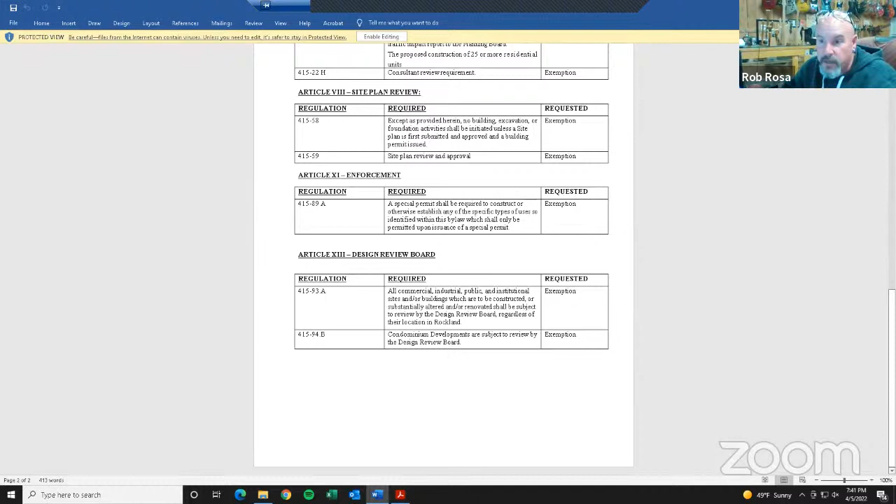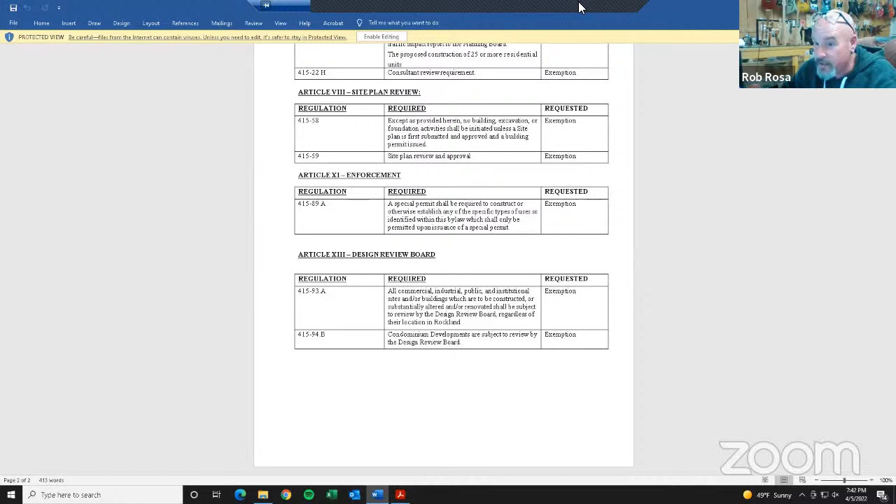Yes, okay, that works. I will ask Pat Brennan to look at this and make sure he's good with all of this. And then if he feels there are other waivers that need to be requested, Attorney Galvin, will we be able to add that or recommend those be added to the list?

Yeah, I'll call Attorney Feely and we'll make sure we're all on the same page on this. We can give him what a draft permit looks like, so he sees what the typical conditions of an approval would look like. I think that'd be very helpful, just to see how these are dealt with. And by the way, we welcome comments typically too on the draft decisions.

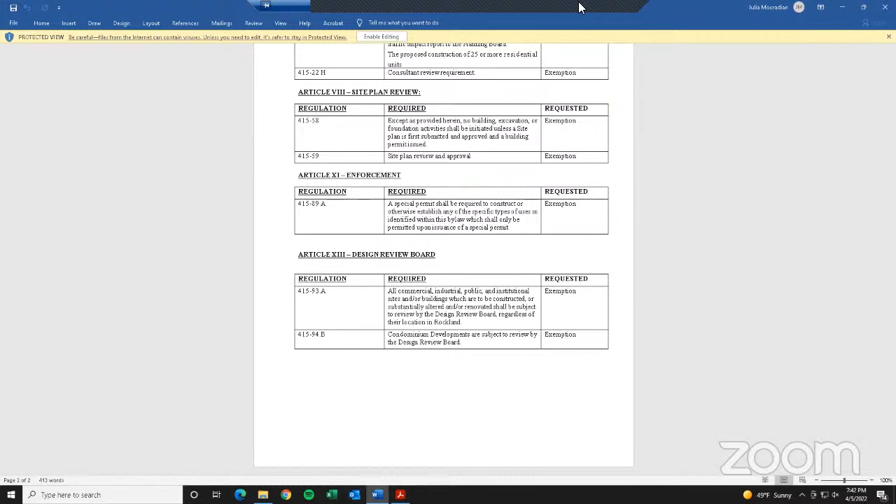Thank you, John. All right, so that kind of takes care of the exemptions. Let's see, Mr. Tanzi, we talked to you. You were okay at this point? No, yes, okay.

Mr. Baker Jr., I see you down there. Yes, just a quick question on something we've already discussed regarding the potential exemption from the 5-year paving moratorium. Is that something the applicant should be asked at this point to add to that list? Should it apply to them? Good question. Yes, the answer is yes, they should ask for that waiver.

Based on what has been submitted for this meeting and the discussion we've had up until this point, believe it or not, I have nothing to add. It's always a good thing. Thank you very much.

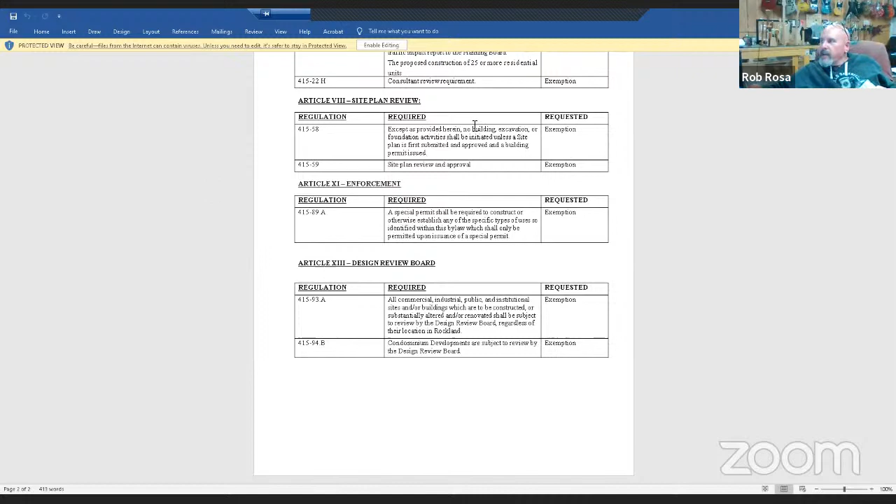Oh, I hear what you're saying. It gets a little iffy when it's not colored. I'm trying to look at the original application and I can't read it. If you look at the grading and utility plan C2, it's more of a blow up, and you can kind of see better where the property line is. Okay, grading and utility.

Okay, good. So the property line goes along the barrier where the extra church parking is, almost through the islands that they're going to be putting together. Okay, good. And those islands basically mark that edge of the property line.

More or less, yeah. Okay, good, because that's what I wanted to ask about, that's what I was confused about with the parking and where their property was, because I thought that was going to be part of their property based on something else I read, unclearly. So I wanted to make sure, because I was going to ask questions about the parking signage on that, but that answers the question, because my question is moot as far as that goes.

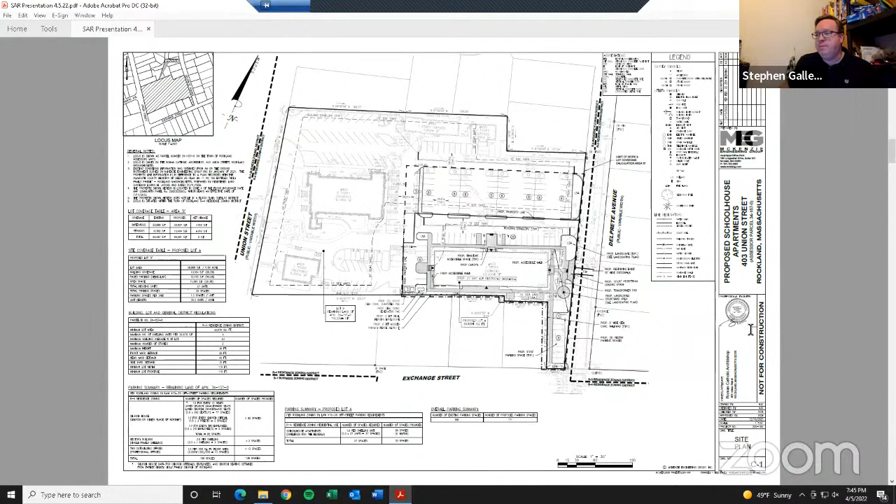But I do want to make a comment. We were talking about signage, like do not enter and one way, on the parking plan. And their signage already has the thing about do not enter for the rectory and going into the uphill church parking with all the slanted parking spots. So their plan already mentions do not enter on both sides, but I would strongly support a one-way entry sign at the Union Street entrance, because that would create a lot of pressure for people not to exit that way. If everyone thinks they can just come in that way, I think it would help.

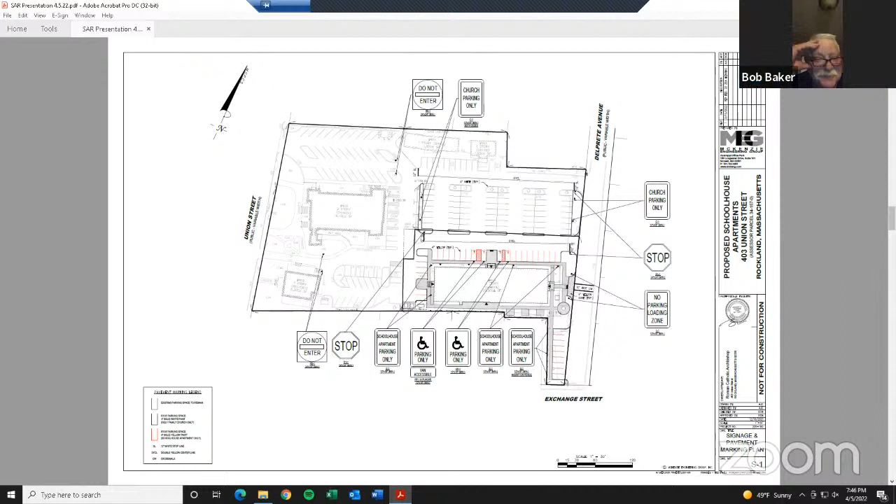That's the one thing I think they've got covered with the do not enter, but I do want to reiterate, I support a one-way street entrance sign at Union Street. Good catch, sir, very good catch. I see that now. Thank you, Steve, it's off the page when we were trying to talk about it.

Lastly, let's see, I went through all my board members that are here. Mr. Rubel, I talked to you. Mr. Attorney Galvin, he's been very helpful. I want to address one other thing that got brought up by the planning board chairman. Talk to me about what's going to be going on top of the building when it comes to like AC units and stuff like that. What's up there right now?

There's HVAC equipment and exhaust fans because there's no AC. What's proposed is new air conditioning units, and it'll be behind a mechanical screen.

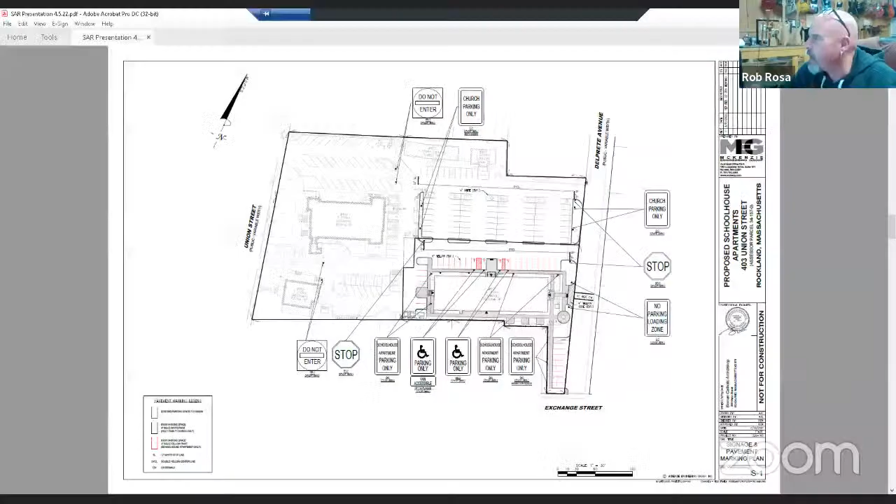Do we know what the mechanical screen is kind of going to look like? It's part of the historic tax credit filing, but there it is right there, and it's set back pretty far on the roof. Can we blow that up a little bit? I'm assuming it's just some sort of slats, like that. It's almost like a louver.

Are we going to have to worry about excess noise up there? No, the equipment is attenuated for sound, and the mechanical screen will help too. We always look out for that. Very cognizant of that.

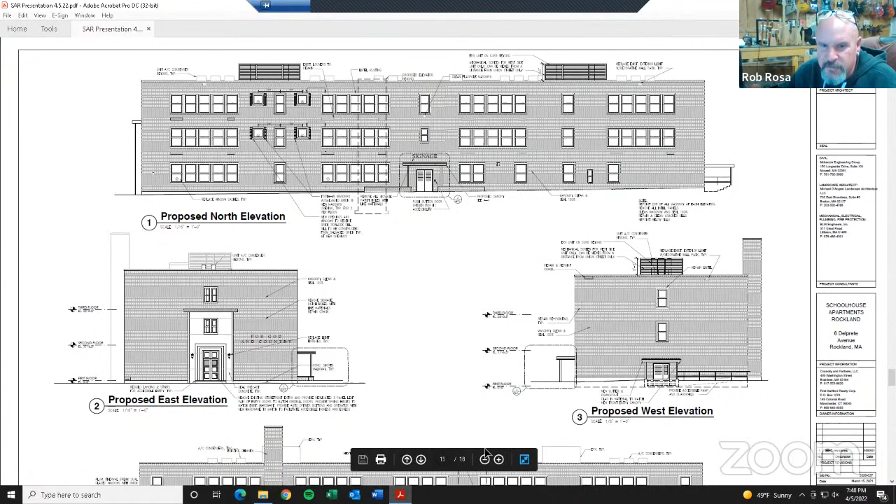We have zoning bylaws when it comes to sound, I believe. If not us, then it's the Board of Health — I think it's a health code, correct? So as long as whatever is proposed meets what our Board of Health says, we should be good to go. If not, could you do me a favor and for the next meeting provide us with some information on the noise these units are going to produce, and make sure they're under what is required by the Board of Health.

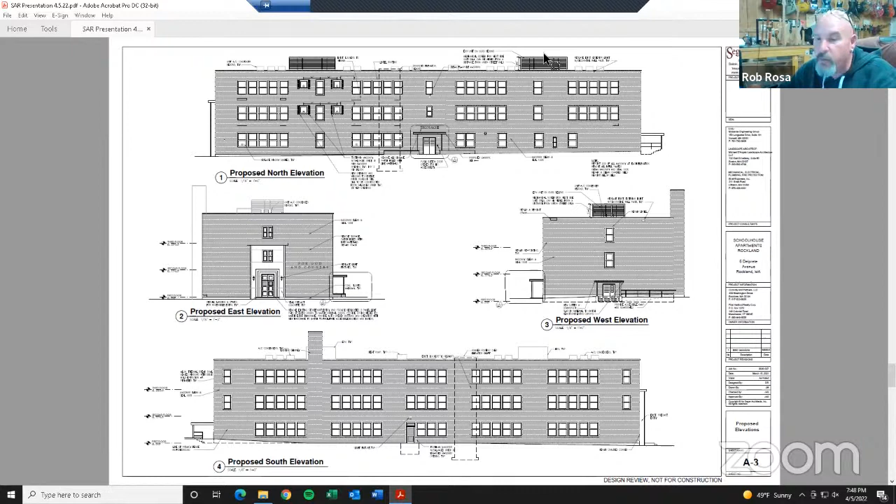Does that work? Sure, we're still under design, but I'll have my engineers send the cuts for the units. Perfect — as long as we know it works and we don't have to add another item to the list, we're golden.

All right, that's all that I got at this point. Can we stop sharing the screen so I can see who else we got on the line here?

Is there anybody in the general public that wants to talk about this application? Hearing none, motion to continue the public hearing for 6 Delprete Schoolhouse Apartments till May 3rd at 6:30.

I want to hear from Deb. Can't do May 3rd. And we've got Shingle Mill on May 17th, so we can either add dates in May or go to June.

Mr. Feely, what's your general feeling on this? Obviously, the earlier the better. It should be fine, but it does conflict with our filing for tax credits.